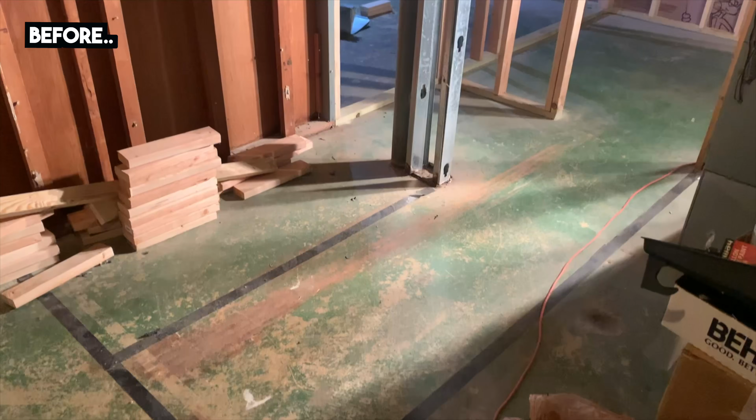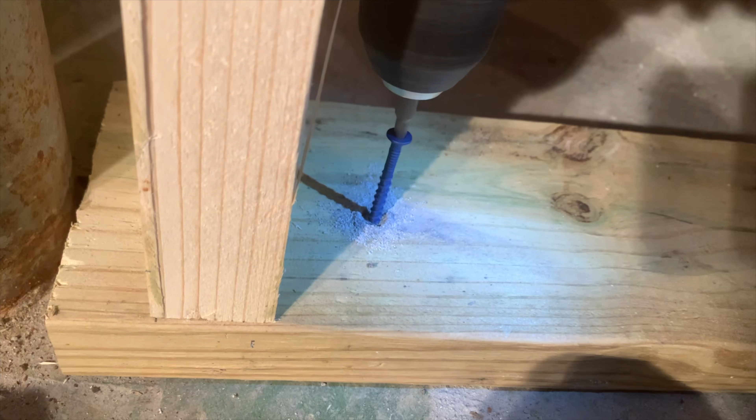What's up, everybody? In this basement bathroom framing video, I'm going to show you everything you need to know about framing walls in your basement bathroom. This is going to include framing a 16-inch on-center wall, how to frame around support beams or columns in the basement, and also some tips and tricks for how to frame around things like pipes or HVAC. So if that sounds good to you, let's get right into the video.

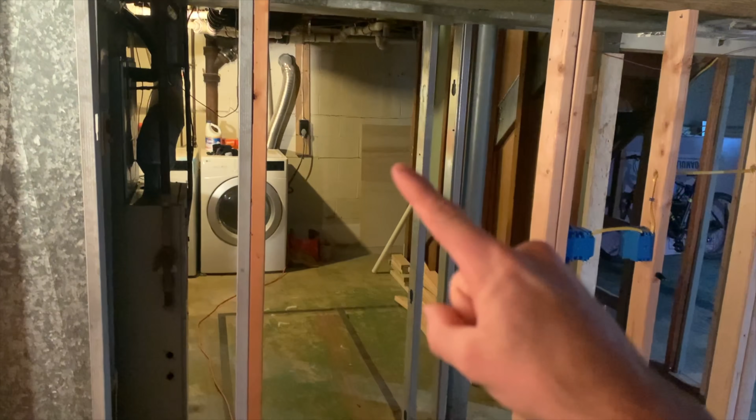So before we can actually frame the walls, we need to have an idea of the layout for our bathroom. So here's what I'm thinking. So here's a quick tour before we get started. So the idea is we'll put a barn door right here that'll open up that way. And then you'll walk into the bathroom like this. If we turn to our right, this is where we're gonna put our sink and vanity.

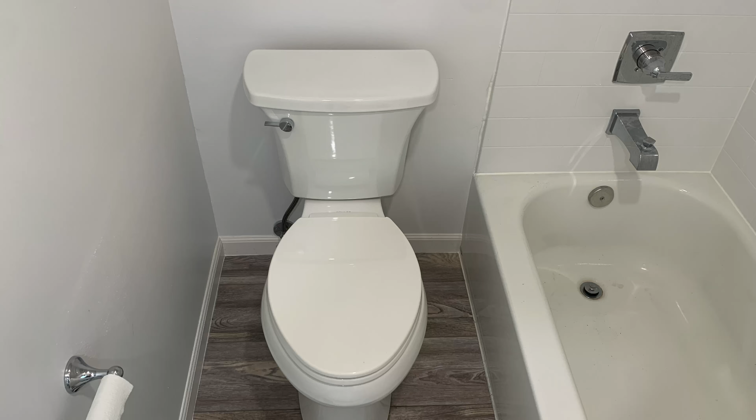And then we'll have a partition wall that goes here and also on this side. And then once we have that partition wall, we'll put the toilet right there. And then this area here marked off with tape will be where we put the shower.

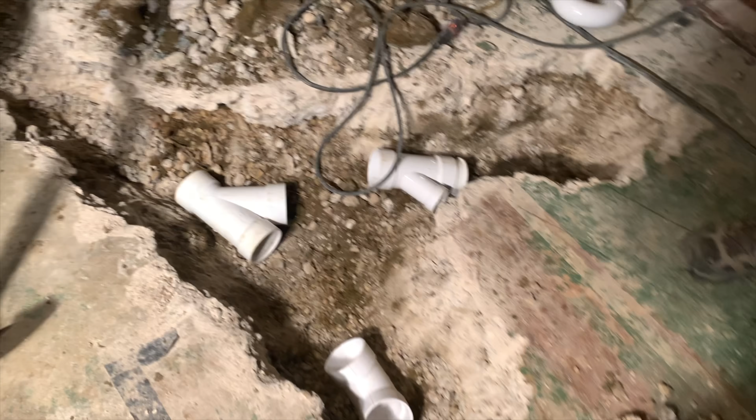I have more info on layout in my ebook and also my video, and I'll link that down below, but I do recommend that you put some tape down to kind of establish the layout for the walls. And I don't mean to insult your intelligence here, but obviously the basement plumbing and the slab should go in before the walls. Okay, now let's actually get into the framing.

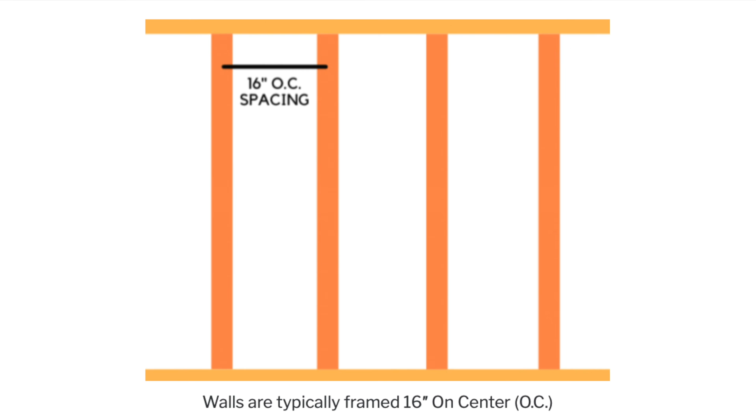Now, when framing a basement wall, you're gonna have the top plate, the bottom plate, and your wall studs, and those wall studs are typically gonna be placed 16 inches on center. The bottom plate is going to be in contact with your concrete slab, so that needs to be pressure treated, and the top plate can be standard kiln dried lumber.

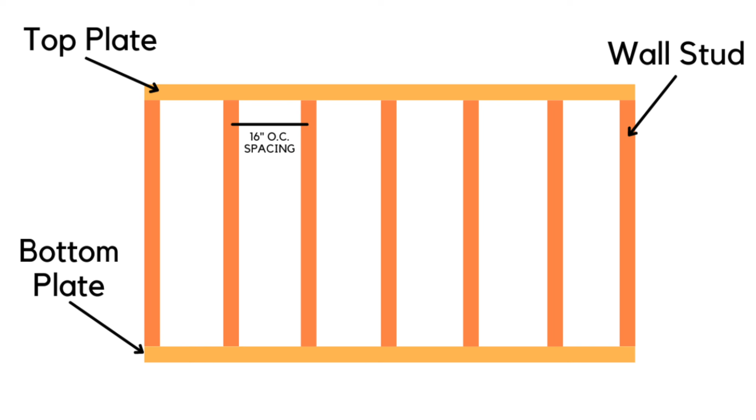Now, something else I want to mention is the double top plate. If you're building something structural like a shed or new construction house, you want to have the double top plate on top, which provides extra rigidity, and it also ties the walls together. But in a basement bathroom like this, where the walls are really just for the shape of the room and to hang drywall, we don't need a double top plate for this application.

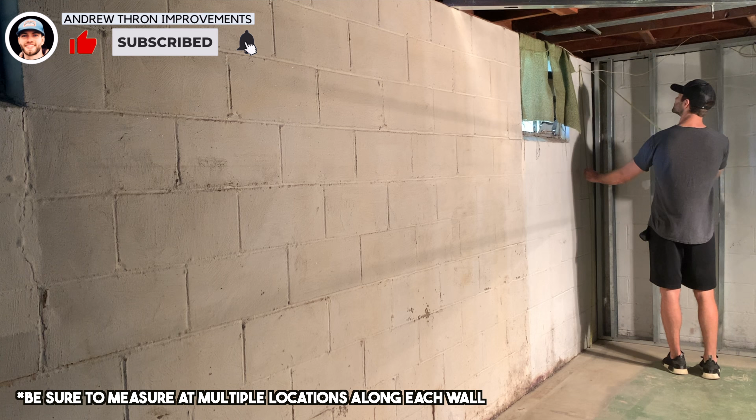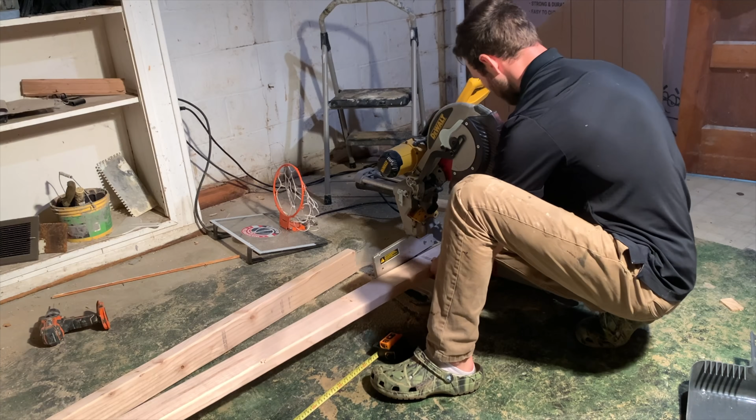The first step in framing walls is to measure the wall height, which is the distance between the floor slab and the joists above. Measure in a few locations, and the shortest measurement is what you want to frame your walls to. So now that we know the height of the wall and hopefully how long the wall is going to be based on our layout, you can go ahead and cut your top and bottom plate to length and then cut your studs to the right height.

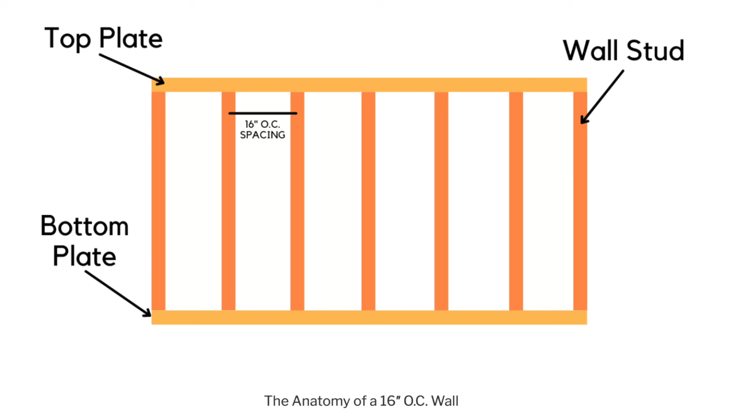Now keep in mind that the total wall height is going to consist of the stud and then the 1.5 inch bottom plate and the 1.5 inch top plate. So when you cut your studs, make sure that you account for that extra 3 inches that's going to come from the top and bottom plate, since a 2x4 has an actual thickness of around 1.5 inches.

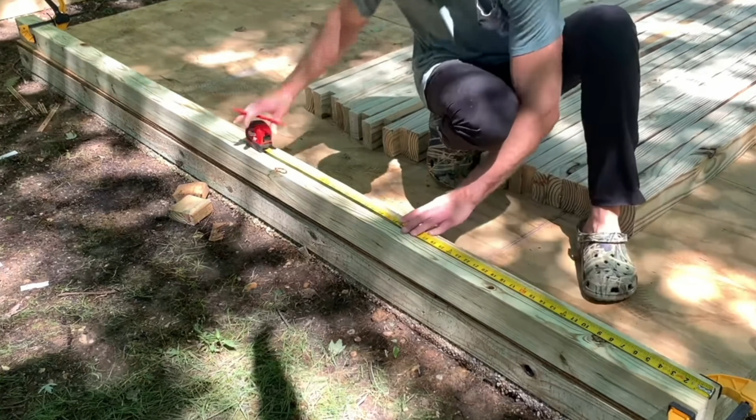After cutting your studs to length, you want to take your top plate and bottom plate, and I recommend that you run the tape measure along, marking 16 inches on center all the way across. And because the studs are 1.5 inches, I usually mark 15 1/4 and 16 3/4 on the top and bottom plate, so I can position the stud right in between the lines.

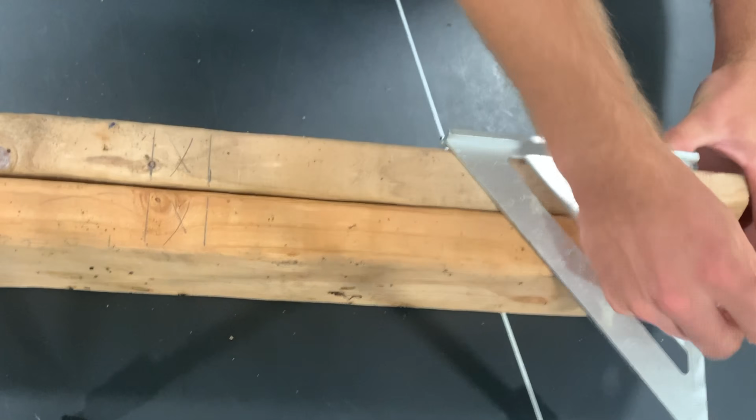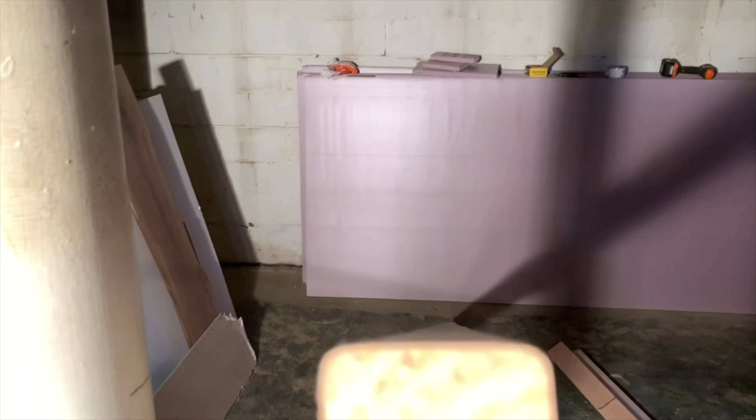Now it's time to position the top plate, the bottom plate, and the studs, and one thing you want to do is you want to crown all of your studs, and the crown of the board is just the slight curvature that you're going to see when sighting down the long edge of a 2x4. Typically, I'll use a framing nailer and 3.5 inch nails to go through the top and bottom plate and into the studs. And for simple walls like this, that's pretty much all there is to it.

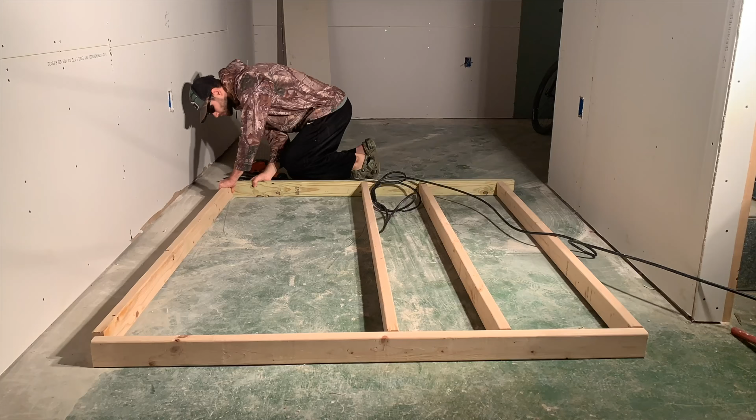Take the bottom plate, which is pressure treated, the top plate, position the outermost studs in place and nail them in using a framing nailer, and then position the intermediate studs 16 inches on center in between. After nailing the wall together, position it in place, aligning the bottom plate along the slab where you want it and making sure that the wall is plumb using a 6-foot level.

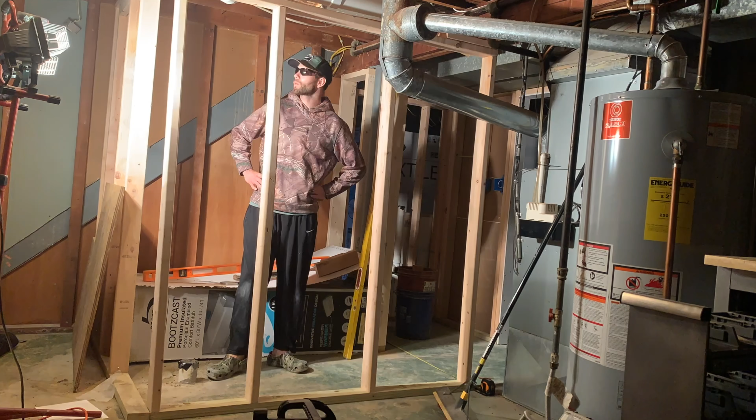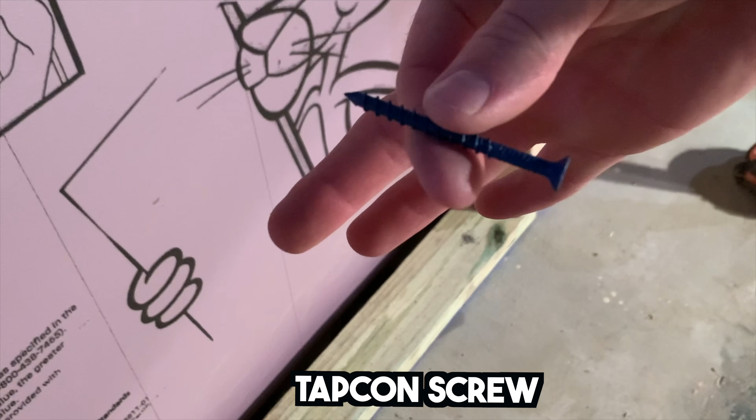So after positioning the wall in place, it's time to attach the bottom plate to the concrete. There's a few different methods for doing this. For my basement bathroom, I used a carbide tip masonry bit to pre-drill through the bottom plate and into the concrete. And then I used a Tapcon screw, which is meant for concrete, to go down through the bottom plate and into the slab.

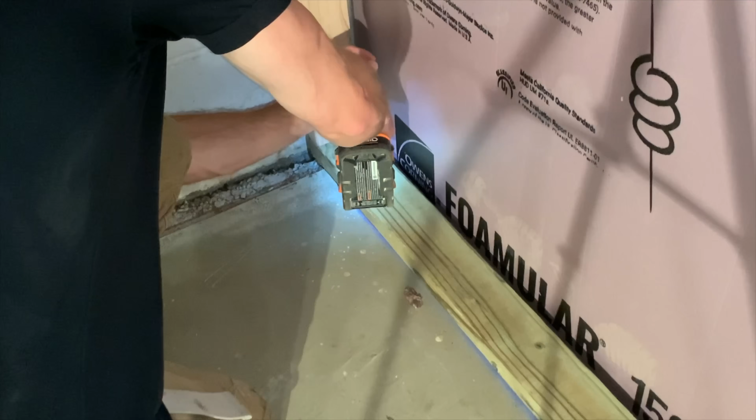Now, although I anchored all of my bottom plates to the slab using a carbide tip masonry bit to pre-drill and Tapcon screws, you can also use a powder actuated tool, which is going to use gunpowder to essentially launch a nail through your bottom plate and secure it into the slab. I didn't have one of these, but it would have been a lot faster.

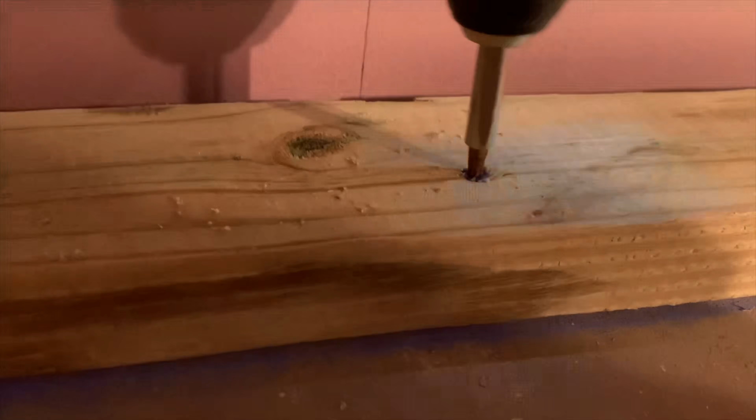After attaching the bottom plate, confirm one more time that your wall is plumb, insert shims as needed, and then use your framing nailer to attach the top plate to the ceiling joists above. Now, pretty much anytime you're framing in a basement or a basement bathroom, you're gonna have some kind of header or a support column that you're gonna need to frame around. Let me show you how I did that in my basement bathroom.

All right, so the next thing we have to do is frame around the support beam and this column here. So obviously, this is gonna be a little bit wider than your standard 2x4. So I'm gonna rip down some 2x6s to the same width. And then we're gonna frame around this guy so we can put the vanity there.

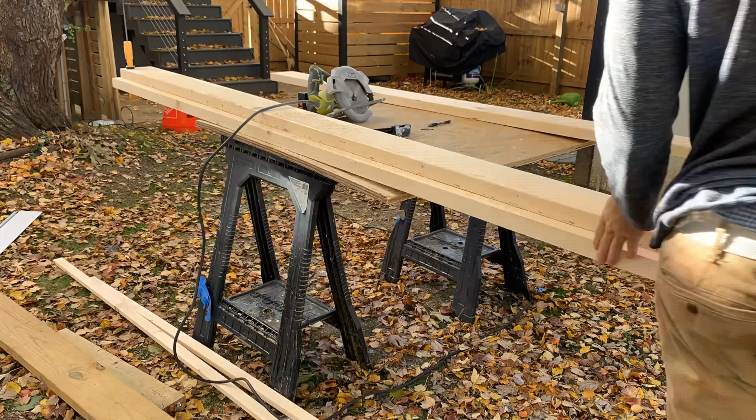So as you saw, that header had a width of around 5 inches, so I'm gonna take this 2x6 board, use clamps and another board as a straight edge, and rip it down with a circular saw to around 5 inches so that it matches the width of the header. And just like our 2x4 walls, we're gonna position the studs and the top plate and bottom plate in place, just using 2x6 lumber that we ripped down to 5 inches.

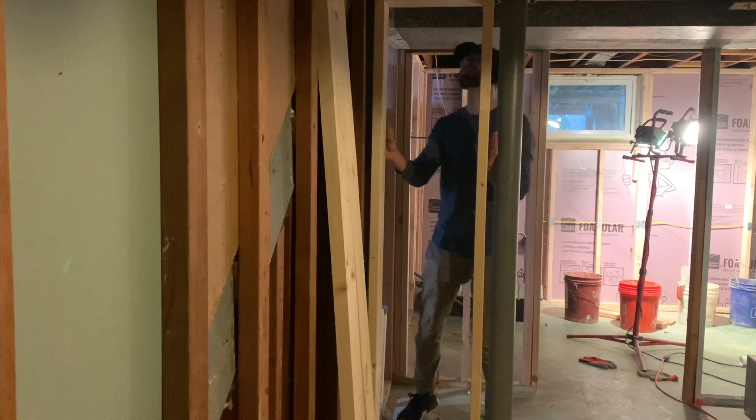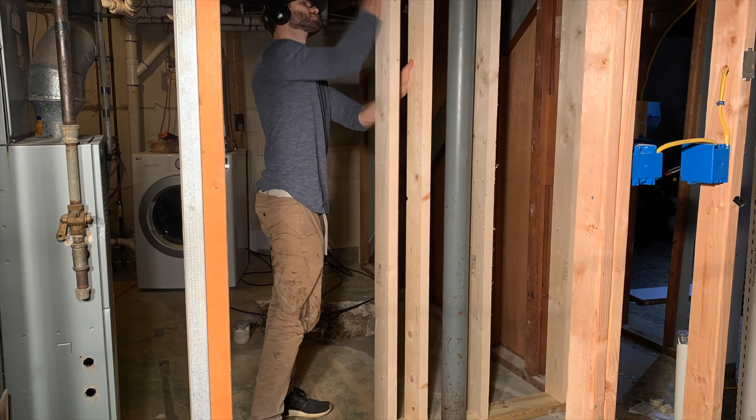And after nailing everything together, I picked up the wall, positioned it in place, and I had to use a hammer here because it was a pretty snug fit to actually get it level and plumb. Then I repeated the same process for the smaller section of wall, which is going to go on the left-hand side of that support column. Then I did some final checks for plumb, and then I confirmed the width to make sure my vanity would fit.

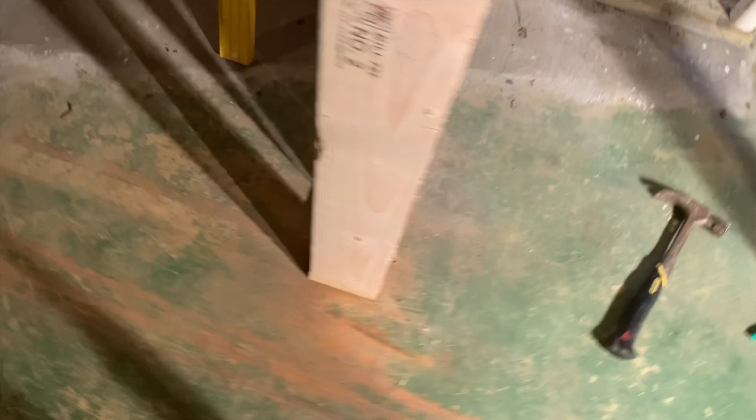All right, so at this point, we have our wall in place. Got it all squared up around that column. And obviously with any wall, you want to make sure that you're level at every single one of these, both this way and this way. So the next thing we gotta do is anchor this to the concrete. So I have a hammer drill right here with a carbide tip bit. We got a Tapcon screw.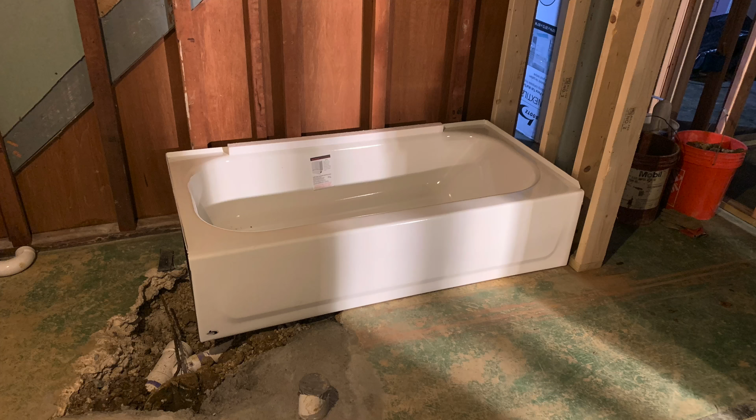And after getting that wall installed, I positioned the tub in place so I could see where I needed to position the back wall. Okay, so before the plumber can actually set the tub, this is where the tub's going right here. He asked me to go ahead and frame in this back wall.

So as you can see, I already framed in the front wall, and these tubs are typically 5 feet long, so 5 times 12 puts us right at 60 inches. So from there to here, I measured out just a hair over 5 feet for this wall. And then I transpose those marks there. I'm gonna put my joist right there and then stick frame in between.

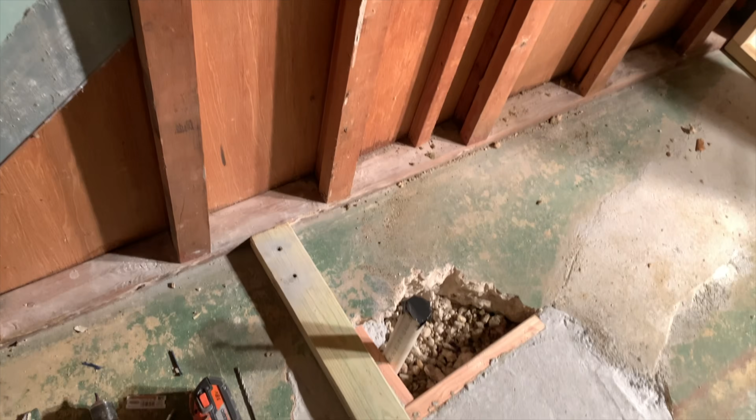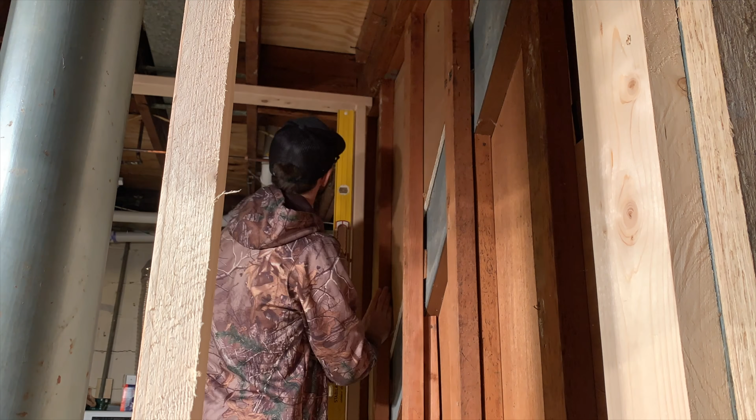Now, for some reason on this back wall, I decided to install the bottom plate first, and then I installed the top plate directly to the ceiling joist, making sure that it was directly above the bottom plate. Then I made my measurements, cut all of my studs to length individually, made sure they were plumb, and toe nailed them in using a framing nailer. I have no idea why I chose to frame this back wall like this, but at the end of the day, it worked out. Again, be sure that you crown your boards and make sure the crown is facing the same direction for all studs.

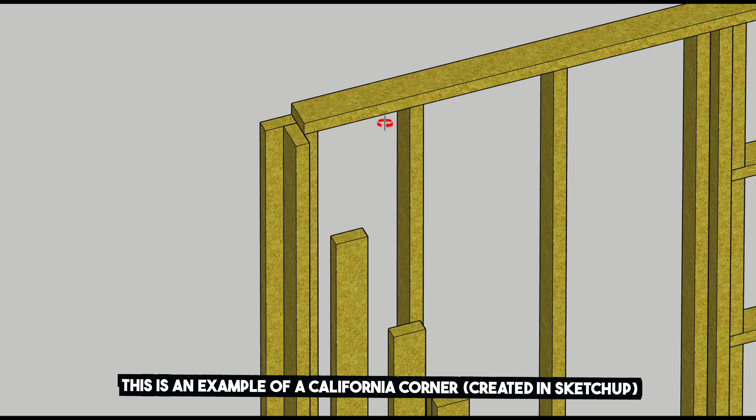Here I have the 2 walls intersecting, and to create a backing for the drywall, I installed these pieces of blocking at the bottom there, and then about every 18 inches or so up. But a better method for this is something called a California corner. So if we remove the top plate, you can see that we're gonna have a typical stud in the corner that you're always gonna have, but you're also gonna turn one stud sideways and mount it to the inside face of the other stud. This will accomplish 2 purposes. 1, it's gonna allow you to insulate better, and 2, it's gonna give you a backing for the drywall or gypsum board you're gonna be installing later on.

Also, you might find yourself in a position where you need to add an additional stud or blocking to attach something like this fiberglass tub insert to solid backing like a stud. So if you need to add one in later, it's no big deal. Just position it in place and then toe nail it in to the top and bottom plate. And if you have any doorways like I did for my bathroom, you're gonna cut out the bottom plate through the entryway using a Sawzall.

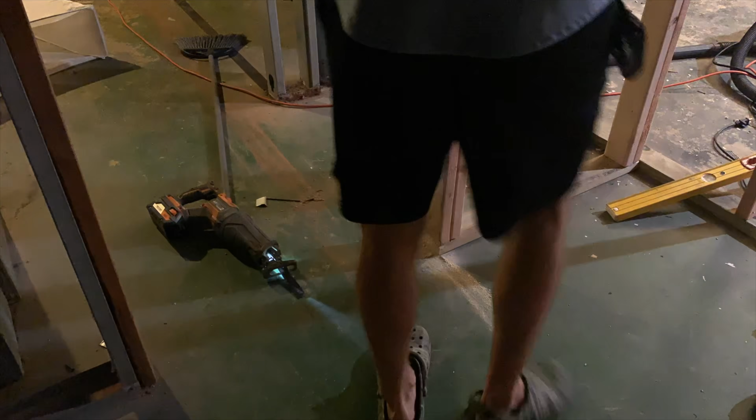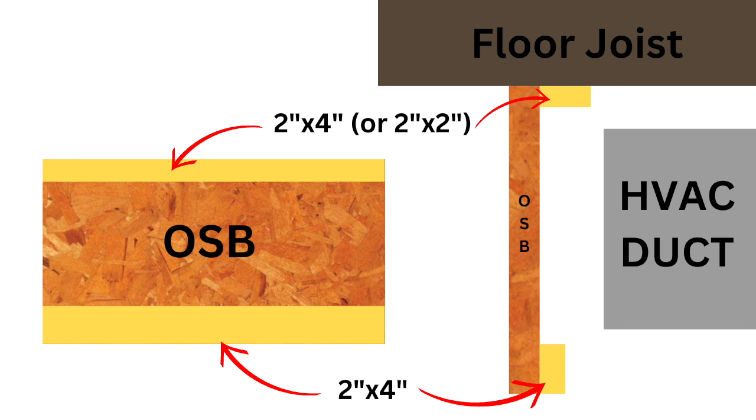Because we're working in a basement, there's a high likelihood that you're gonna have pipes or HVAC ducts that you're gonna need to frame around. To frame around these in my basement bathroom, I used an OSB and kind of ledger board system. For this method, you're gonna attach a hanger board, a piece of OSB, and then another board at the bottom. I think this is the easiest method.

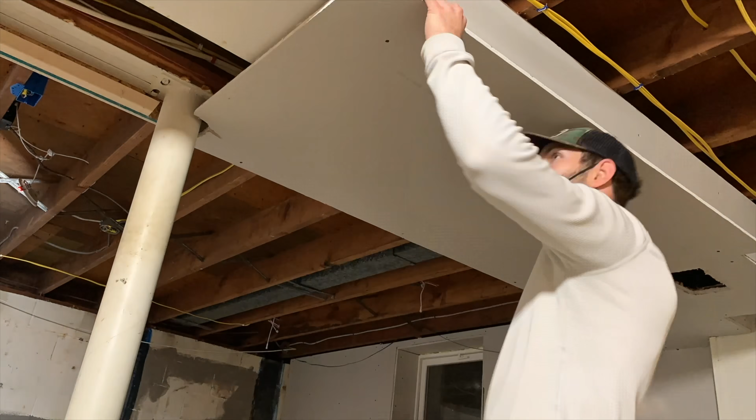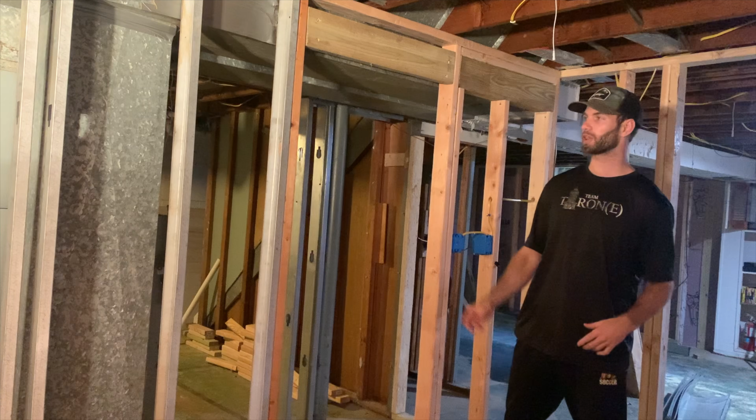In the next couple episodes in this basement bathroom series, I'm going to show you how to install a drywall ceiling in your basement bathroom, how to install LVP flooring, how to do the plumbing, all that good stuff.